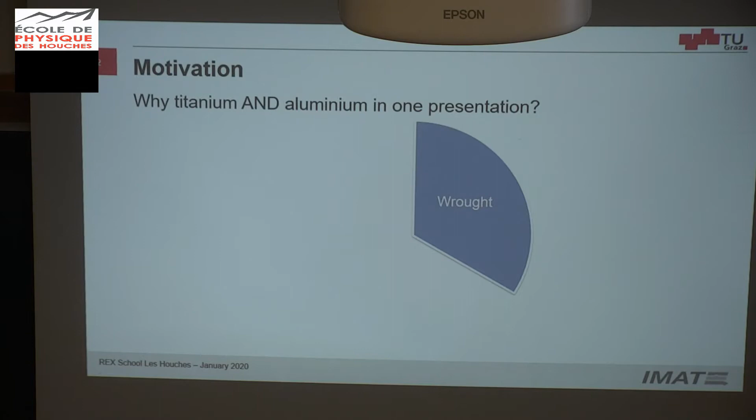The first question I asked myself when preparing this presentation is why titanium and aluminium in the same presentation? Of course I have my scientific answers, but the very first answer is both are mainly used as wrought materials. So it means I have to have a method for forming them. They are used for lightweight design, usually for transport industries, but not only.

This is the topic we are going to deal with today: we have grain refinement and texture issues, which means basically they don't dynamically recrystallize in the sense of discontinuous dynamic recrystallization, and therefore we don't have fine grains with random crystallographic orientations in the final products. These issues also have consequences in the applications.

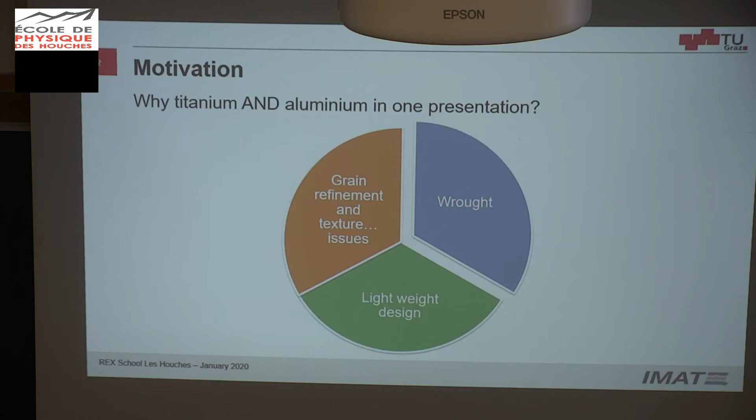I'm going to give a very short introduction on titanium and aluminium alloys because the audience is very wide, but I hope I'm not going to bore you. Then a very short introduction of what is the meaning of high stacking fault energy materials, and then I will go to the topic, which is the experiments and modeling.

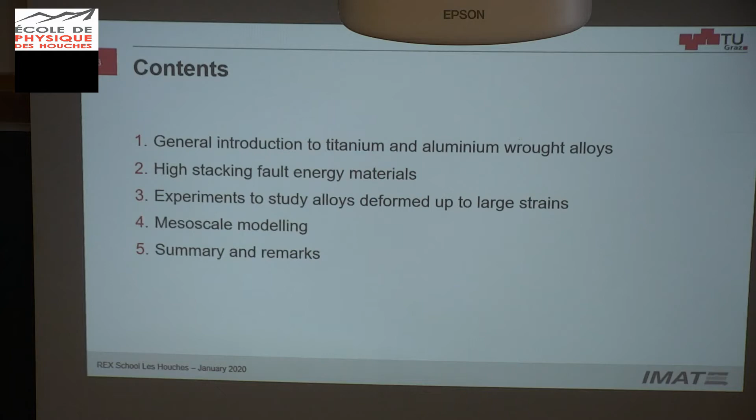My background is experimental. I did experimental things for many years, and then I moved a bit into the modeling, and now I cannot imagine any experiment without a model. And the other way around, I cannot imagine any model without experimental validations or explanations. So it's a big mix of everything I did.

Titanium alloys are used mainly for, as I said, transport lightweight design, also moderate high temperatures, but it's also used, as you have seen probably, like the Guggenheim in Bilbao - all covered by plates made of titanium alloys, because of the high corrosion resistance.

The most important thing in titanium alloys is that it's very similar to steels. If you know something about steels, then titanium is easy peasy. It's even easier because we don't have any eutectoid reaction, but we have this allotropic transformation. We have HCP at low temperatures, which is not close packed, meaning it's a bit longer in one axis, giving a crystallographic structure that is not that bad for deformation.

It also has some other slip systems that activate. By increasing the temperature, we transform into BCC - this is BCC, here is wrong, sorry.

By adding some alloying elements, we can stabilize the high temperature phase, and we can increase the temperature of transformation of this beta transus. Most titanium alloys have this type of configuration, where you have the temperature and the beta stabilizing elements. Also you have alpha stabilizing elements like aluminium, which would move the whole diagram upwards, and then you have a mixture, a dual microstructure of alpha and beta.

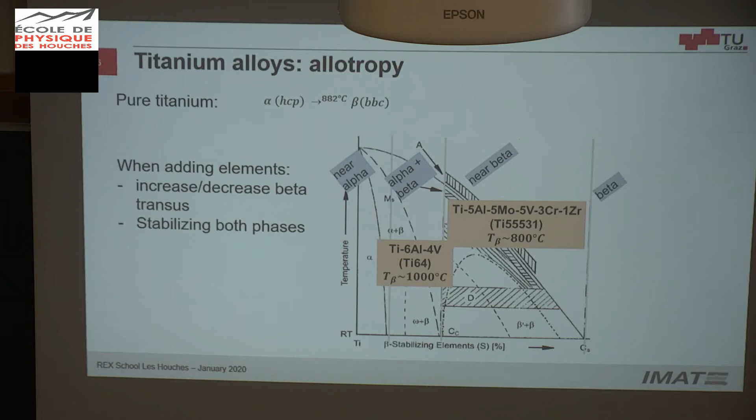So a very complex situation for deformation. These materials are processed either in beta or in alpha-beta, and this makes everything very complex when we want to understand it, control it, and then model it.

Okay, so aluminium alloys - most of you know it, it's almost everywhere. That's why I put it here. Very day-to-day examples. And this is one of my favorite products, to be honest.

Not the fish, but the aluminium foil, because it requires a lot of rolling steps - warm rolling, hot rolling, warm rolling. And then at the end, you cannot heat up again, take it from the furnace and roll again, because the heat transfer is very fast. Then you end up with cold rolling, and in between a lot of steps for recrystallization and also for precipitation. So it has a lot of complexities.

During these steps, you may have dynamic recovery during the deformation. If you do extrusion, you may have very large strains, and in the interpasses you have static recrystallization. So you end up with a microstructure which is very weird.

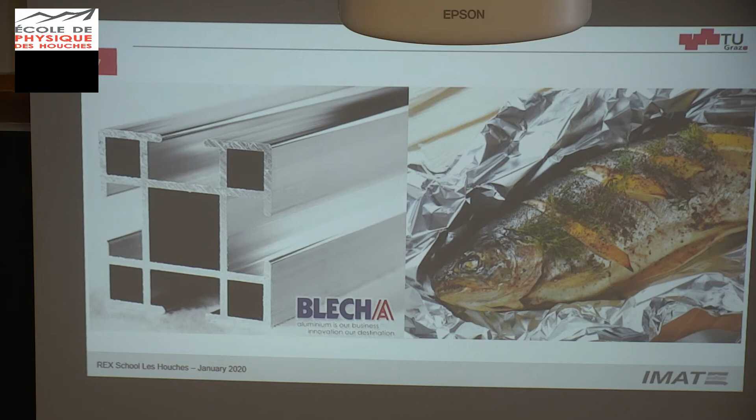What they have in common is that they are high stacking fault energy materials. What does this mean? If we have a perfect dislocation, it can dissociate into two partial dislocations. This configuration does not allow dislocations to move. So it's very difficult for a dislocation to go through stacking faults, and secondly, you lose the dislocations that move into two partial dislocations that are not moving anymore.

The larger this distance is, the more stable the stacking fault is, and the lower the energy you have for forming stacking faults. This is a simplified interpretation of stacking faults and stacking fault energies. But basically, if the stacking fault energy is very high, which means this distance is very small, the partial dislocations can reconfigure into a perfect dislocation, and the dislocation can move as before without problems.

Moving of dislocations is what you need for annihilation of dislocations, and mobile dislocations are what you need for dynamic recovery. So, to recall everything: if the stacking fault energy is very high, this distance is very small, these partial dislocations are not stable. The dislocations will move, and you will have dynamic recovery instead of dynamic recrystallization.

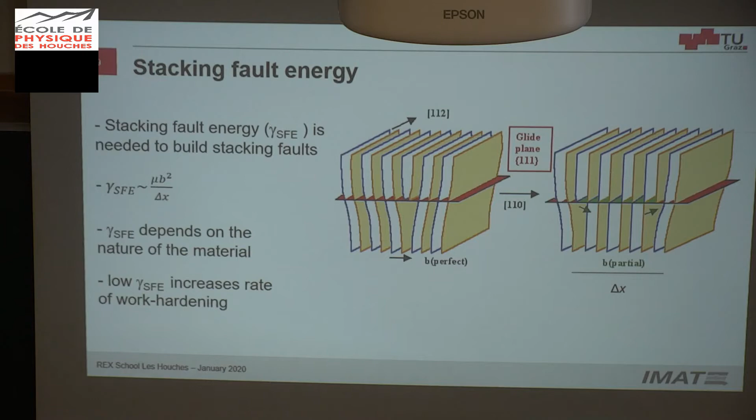The same happens with titanium alloys. Most of them, if you don't add a lot of alloying elements, behave this way. I don't know what happens with high entropy alloys - maybe you will find out in the future. But most materials are high stacking fault energy materials, which means they will go in this direction.

So when we start deformation, we have cold deformation and the density of dislocations increases - this is not what I'm covering in this talk. With warm deformation, at the beginning the density of dislocations increases up to a small strain, then we may have either dynamic recrystallization or discontinuous dynamic recrystallization, like in nickel-based alloys, or dynamic recovery in our case.

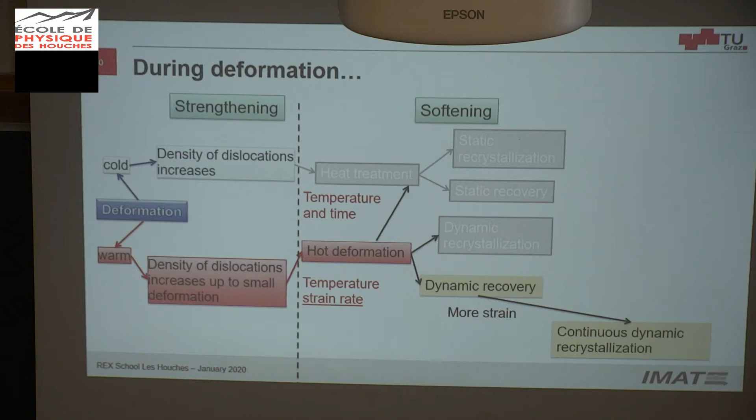If we go further with the strain, we will have what is called continuous dynamic recrystallization, or extended recovery, or many other names you can find in the literature. Basically, these materials form cells during cold deformation rather than stacking faults or twins. These cells look like this: we have dislocations at the cell walls and sparse dislocations within the cells.

During high temperature deformation, the cell walls get sharpened, and then you have subgrain formation instead of cells.

Good. Oops, sorry, come back. Oh, okay, sorry, this isn't supposed to be like this.

So the question of how to refine the grain in high stacking fault energy materials is not new. It was first done, I have to calculate, about 60 years ago, by Rossard, who asked whether there is any form of dynamic recrystallization in aluminium alloys or ferritic steels. By the way, ferritic steels are also high stacking fault energy materials, so you can imagine the same applies as what I'm saying now, but for steels. Why am I not showing steels here? Because I basically don't work on steels, but you can imagine the same applies for ferritic steels.

In 1986, McQueen came with the idea that there is some type of recrystallization when high-angle grain boundaries get flattened by compression, for instance, and get pinched off by the formation of subgrains. This is called geometric dynamic recrystallization, which means you need huge deformation to get very thin, plate-like grains, along with formation of subgrains due to dynamic recovery.

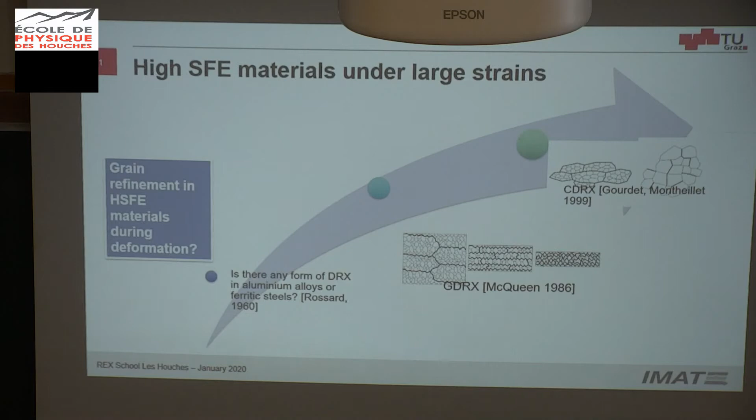When we want to study deformation at large strains, we think about experiments and models. The models, in my opinion, are not meant to replace experiments. Yesterday in the Digimu workshop the same idea was given. The models are a way of explaining the phenomena, as well as reducing the amount of experiments or directing experiments in one direction, but not completely getting rid of experiments. We need experiments to explain and validate, so both of them—otherwise we don't know what we are modeling.

And this was one of the largest problems with respect to continuous dynamic recrystallization and titanium alloys. I'm going to show this afterwards.

So in the experiments, when we want to get deformation at large strains, we want to get the flow curves—stress strain—and the samples for further investigation.

So, you're laughing, but this is not always understood. What did you do with the samples? I threw them away, I don't know the name. I changed them, I mixed them.

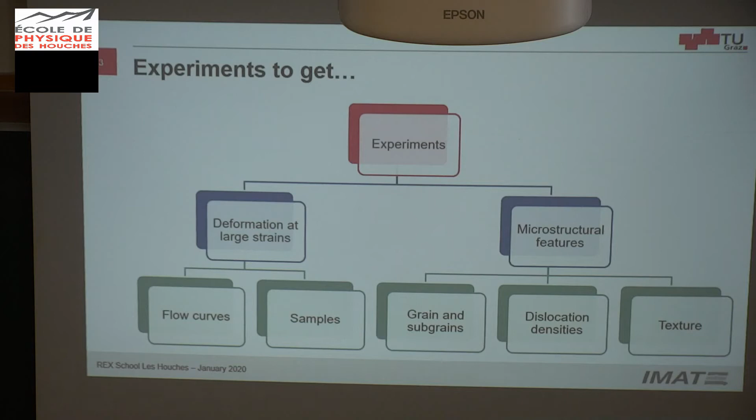Which experiments? For deformation at large strains, you don't have many options. You have hot torsion—this is a typical experiment, not a new one. You may have something similar in industry, like hot extrusion. There's also a way of getting large strains in small steps: you get a strain, then static phenomena, strain again, static phenomena again—so you have cumulative large strain, but not continuously.

For microstructural features, you may use direct methods—you open the material and take a look at it. This is microscopy, any type of microscopy, mainly for dynamic recovery. We use a lot of EBSD.

I have a clock there. Okay, thank you.

Then you have other methods, indirect methods, which are not much used. I know Andras is working a lot on XRD, but you may also have differential scanning calorimetry to account for stored energy, for example, or hardness. It's a very simple method, hardness, but it gives a lot of information about stored energy.

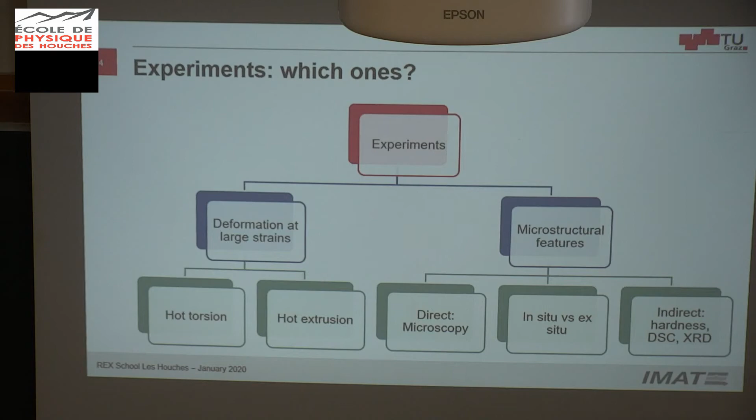So I'm going to show only one of my favorite experiments, the torsion test, which we do in a Gleeble machine. I don't know how many of you know the Gleeble machine—one, two, three, four—ah, a lot, good, great. So you know all the pros and cons, or most of them.

It's fast. You can control the temperature very well because the thermocouples are attached to the sample. You can do in-situ water quenching, which is essential if you want to study dynamic recovery. Otherwise, you will have static recrystallization during cooling, or metadynamic recrystallization in this case—but static recrystallization occurs very fast.

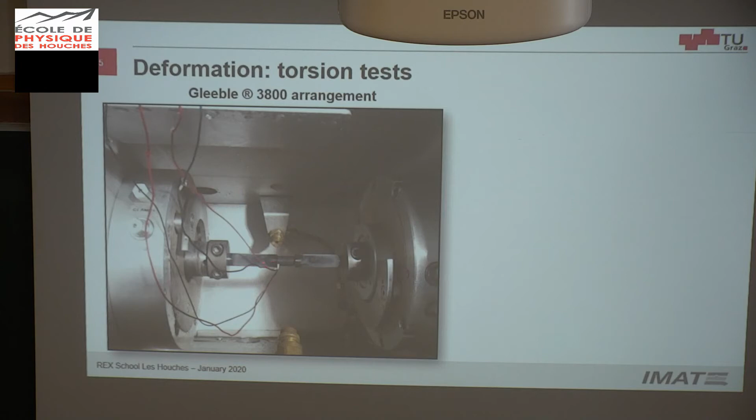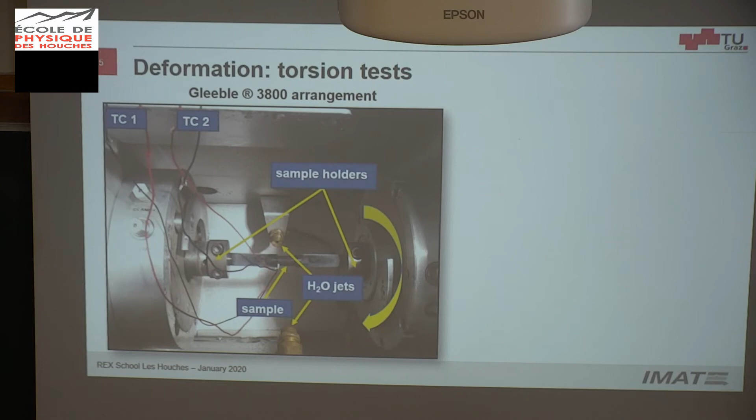And in this case, this is here the sample. These are the sample holders, and one head is rotating infinitely until the material breaks. You can heat up the sample by alternative current, by the ohmic resistance of the material.

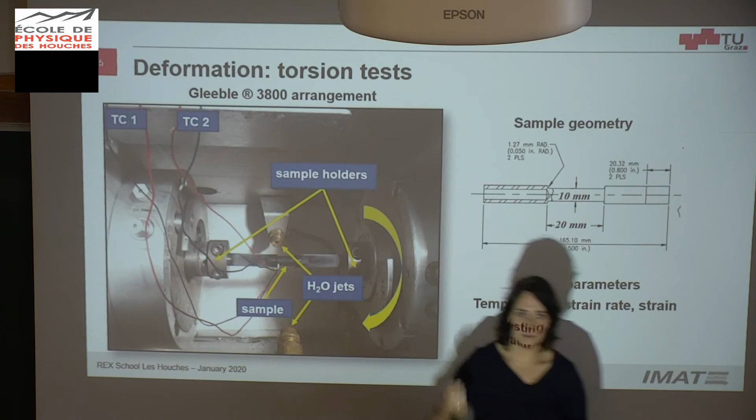Of course, if you put the thermocouple here, in the middle of the sample, and you start rotating, then you strangulate your sample. So this is not the best way. So you put the thermocouple on the shoulder.

The shoulder looks like this. The sample looks like this. It's hollowed at the heads. With this, you get more or less the same area here than here, so the same section, and more or less the same resistance, and with this, more or less the same temperature.

What we do is usually we just put thermocouples here, do heat treatments and calibrate until we know which temperature we have to control or set here to get what we want. The most important thing is to decrease the gradient of temperature here, because a large gradient of temperature produces flow localization, which is not desired.

Yeah, so you have a technical question. Your sample has this total length, or is only 20? This is the total length here, all of this is the same. And you drill a hole to slide the thermocouple in? No, the thermocouple is spot welded here on the shoulder of the sample.

No, it's only this part. If the sample is good, only this part is deforming, and this is not deforming. But of course, you may have some difference in temperature between this point and this point. What you don't want is a temperature gradient along the gauge. This is what you don't want.

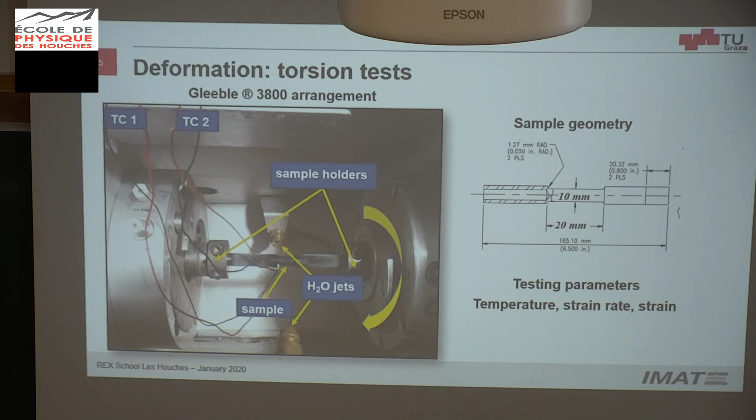And then you have the water jets. These are positioned here. In our case, we had to also modify this a bit, because we saw that it was cooling down only from one side and not from the other. Good. If you have further questions on the Gleeble, I will be very happy to answer them.

So the first trials on aluminium alloys showed something like this. This is light optical microscopy along the gauge, and this is EBSD. What you see is that the microstructure is very heterogeneous.

So we didn't cut as usual. People cut at a given percentage and just watch the microstructure to represent the global strain and stress values. What we wanted to do is see the evolution of these boundaries. Here in blue you see low angle grain boundaries, and in black high angle grain boundaries.

By increasing the strain, the strain in the middle should be 0. In this case it's not, because the sample was not really aligned, but it must be 0. Then we increase the strain in this direction, but due to the texture of the material, we got this, with some misalignment. We also got this very strange pattern.

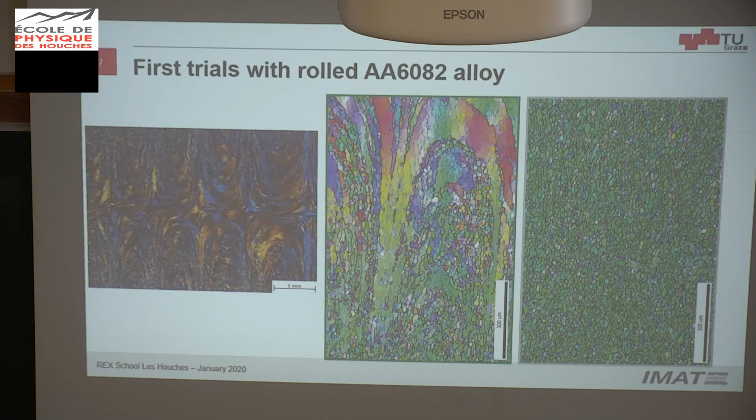We can also see the evolution of the dynamic recovery, continuously transforming into high angle grain boundaries. And what you can see, everything is green, which means we have a very large texture. We produce a textured material.

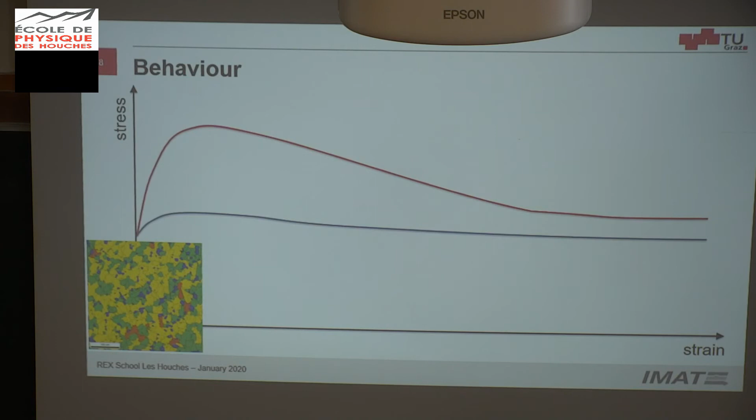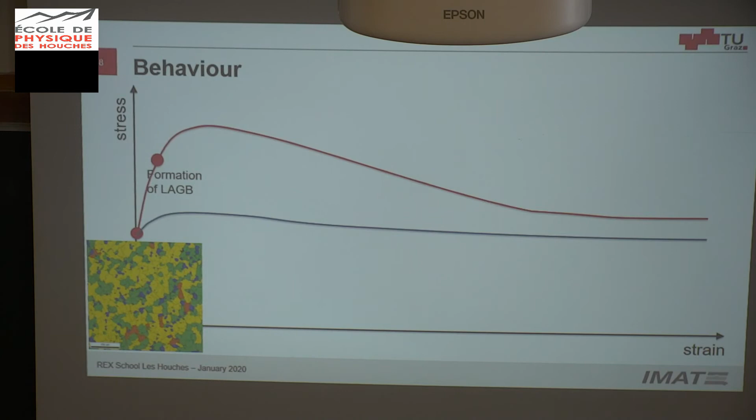So then we decided to go to another material, an extruded material. You will see some of the pictures taken in this direction and some in the other direction of the grains. We have deformation - this is a sketch of low angle grain boundaries at low temperatures. Then at one point we have formation of high angle grain boundaries, and we assume that when we have a steady state at very large strains, above 5 or 10, depending on the temperature and strain rate, we have 100% of recrystallization reached.

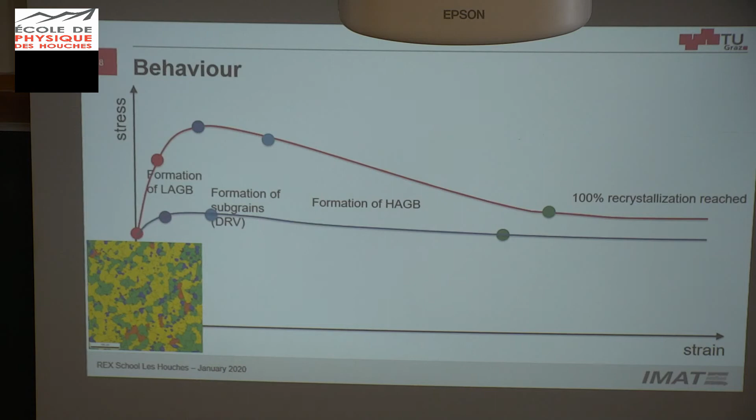Good, and this is how it looks if I go to 350 degrees or higher temperatures. This is GOS, so grain orientation spread map. Blue means low misorientation within the grains, and orange means high misorientation within the grains. It goes through very large transformations until it really starts to dynamically recrystallize continuously.

Since it's not easy to quantify the dynamic recrystallization rate, what we use is the fraction of high-angle grain boundaries. It's another way of counting the percentage or grade of recrystallization. If you only have high-angle grain boundaries, then you have 100% fraction of high-angle grain boundaries, meaning 100% recrystallization.

And in this case, you can compare - the fraction is 67% compared to 14% recrystallization grade. So it's a way of counting this. There's no other way we have in this case.

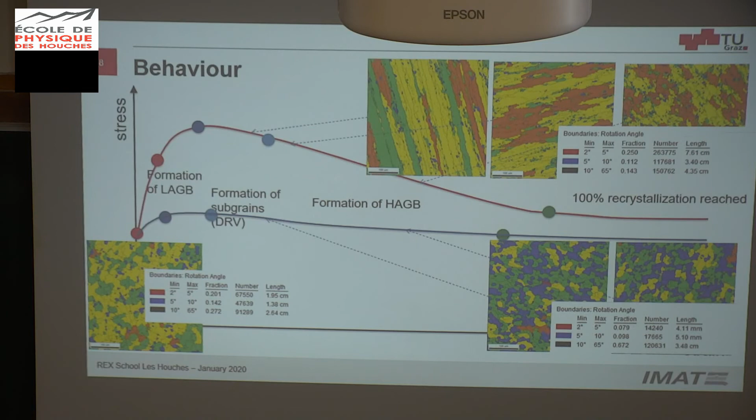We also were trying to quantify geometric necessary dislocations. This is what you get from the KAM maps, and this is the evolution for the as-received samples. The as-received condition is also a mixture of dynamic recovered and static recrystallized structure.

By deforming at low temperatures, we increment the stored energy. So here is the geometric necessary dislocation density. In this direction, you go to higher values of dislocation densities or stored energy, whatever way you want to see it.

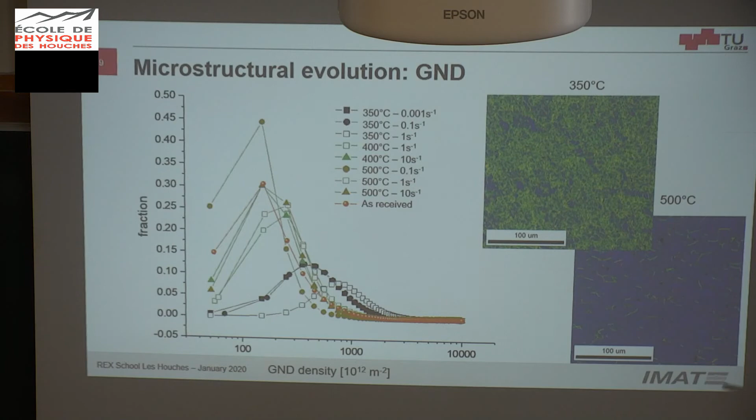So in this direction, we are increasing - this is lower strain rate, higher strain rate, so we increase the stored energy. When we go to higher temperatures, we also get into the other direction. This is very typical - you'll see this not only for large strains but also for low strains. You will see that you increase the recovery at higher temperatures if you go in this direction, and you increase the stored energy in the other direction.

So we tried to do, and we did successfully, an in-situ torsion test. It took us a while because it was difficult to get the proposal approved. Nobody believed that we could do this, and it took us very long until we could do this experiment.

So what is the idea of this? We do torsion tests, and with this we get an incident beam that we made as flat as possible. So we have only one part of the sample very close to the surface, and as it rotates, of course you don't see always the same part of the sample.

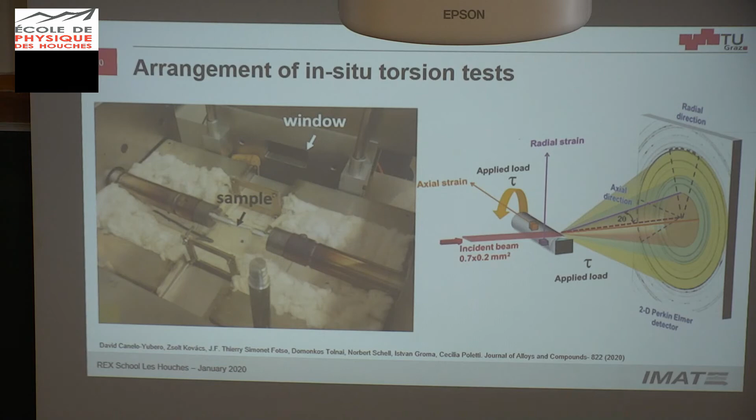But we also could get the evolution of the crystallite size and the dislocation density. At the beginning I was very disappointed because the crystallite size is not the subgrain size, it's not the grain size, it's an entity - much smaller than the subgrain size, and it's only a coherent domain. It's very difficult to interpret and correlate with respect to the EBSD data.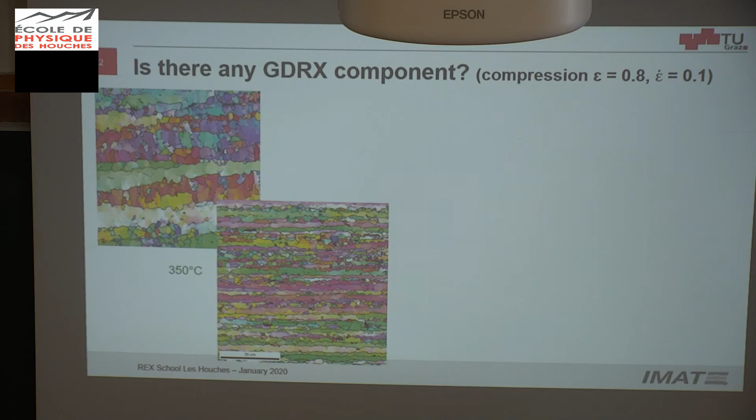So what we did is we took this material and compressed it in both directions, in this direction and in this direction, to see if there is a difference. As you expected, indeed there is a difference. If we compress in this direction, we get this microstructure. If we compress in the other direction, we may have some pinching of the high angle grain boundaries, and as you can see, we have much more new grains formed only by geometric dynamic recrystallization - this is only compressed, so no very large strains.

And the same if we do it at higher temperatures, as you can see, this should be - and as you can see here again, we have a much larger amount of grains. So it means there are some geometric dynamic recrystallization components. We are still analyzing how important they are and what their influence is on the final microstructure.

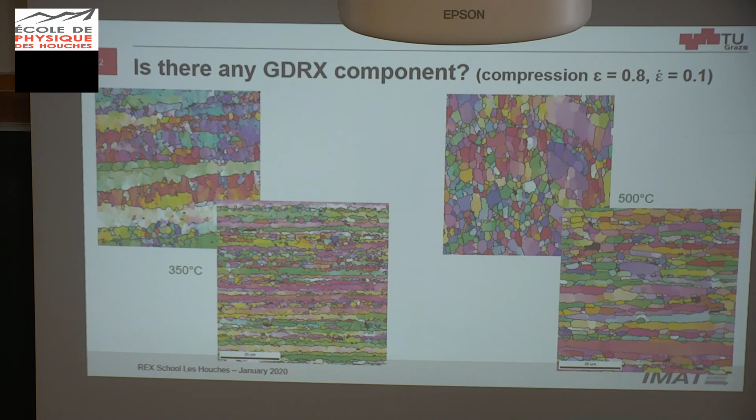Okay, let's move now to titanium alloys.

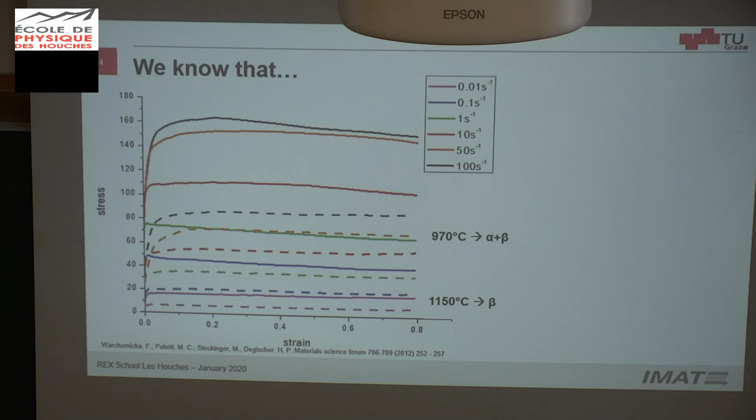We know that if we do deformation in titanium 6-4, when you cool down you have martensite. It's awful for reconstruction, so you see that there is no recrystallization. This is cooled down, there is no recrystallization, so the grain boundary is moved a bit. They are serrated with respect to strain rate, or with respect to the size of the subgrain. But there is no recrystallization.

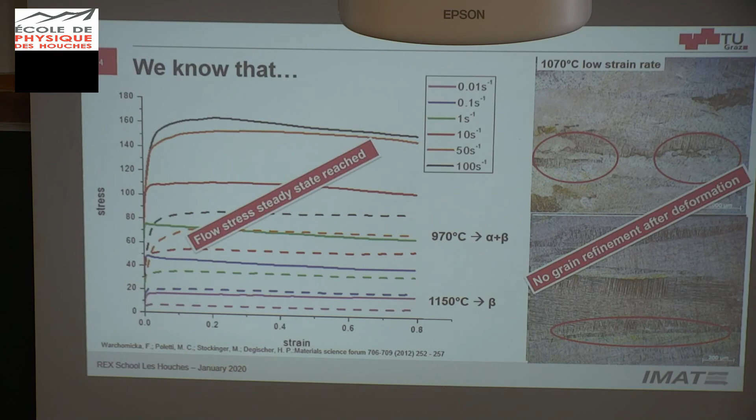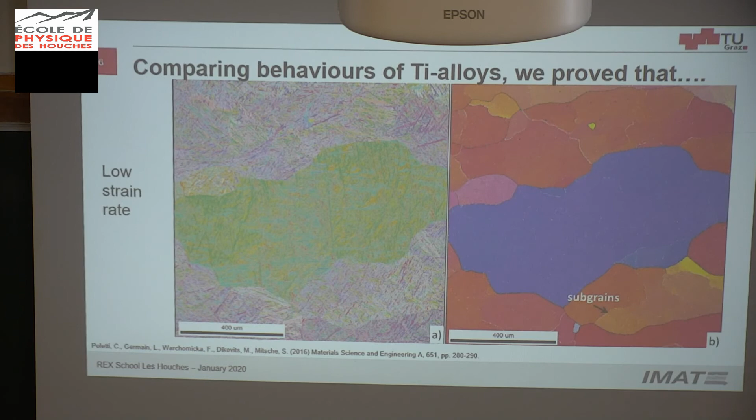And if we reconstruct titanium 6-4, this martensitic structure, into the high temperature phase, this is the martensitic transformation, we reconstruct now the beta phase. We also can see the formation of subgrains and the formation of probably new grains by geometric dynamic recrystallization or continuous dynamic recrystallization at the boundaries, and subgrains as well. So there is no discontinuous dynamic recrystallization in titanium alloys.

And there are still not a lot of publications because it's very difficult to get these kind of results where you quench immediately after the deformation. Especially when you go to very high temperatures, it's very difficult to really quench and have in situ experiments.

And this is important for us afterwards for the modeling. We are not modeling discontinuous dynamic recrystallization with critical strain and so on.

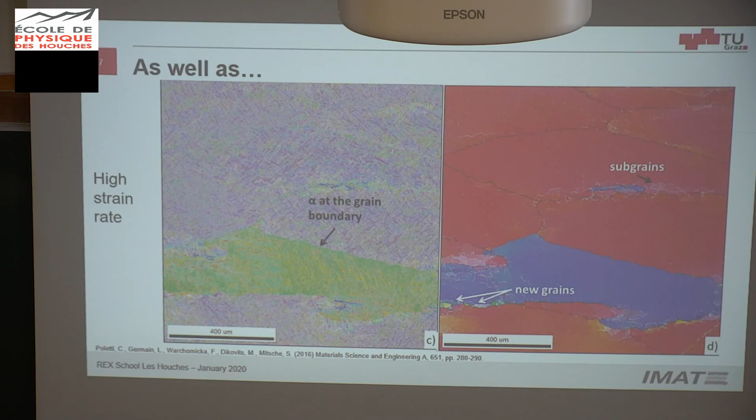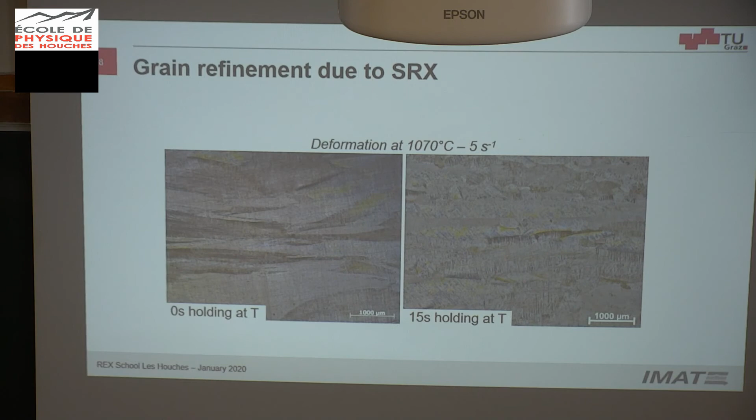And we may have grain refinement due to continuous dynamic recrystallization. What I'm showing here are experiments of the flow curves of compression tests, the same I showed before. Now they look a bit weird in this scale. And torsion tests. In the torsion test, the first thing you see is you have also an increment in the dislocation density, but we have a huge drop in the stresses. At very large strains, we have also a plateau.

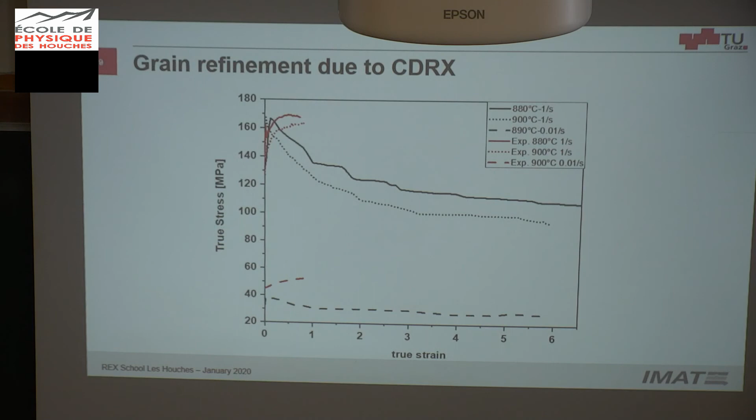At this drop, we have some explanations for it. One is the continuous dynamic recrystallization. The other explanation is we have a texture modification, which leads to a Taylor factor modification. But these two things are not enough, so probably we have something else that we still have to understand.

So here you can see the grain refinement after almost a strain of 6 of deformation at high temperatures, and this is in the two phases range, close to the two phases range. Sorry, the beta transus temperature is 870 in this case.

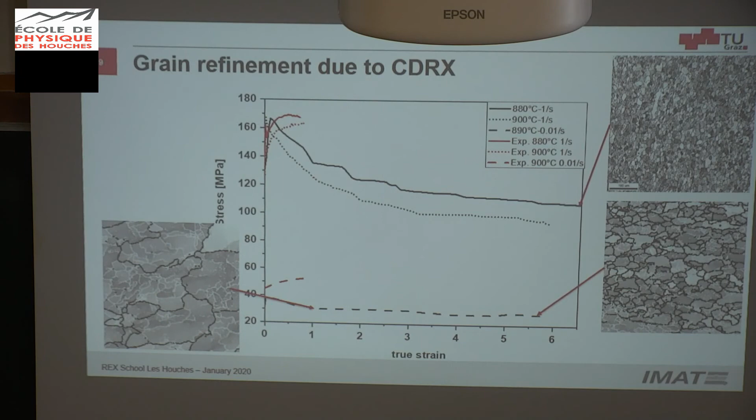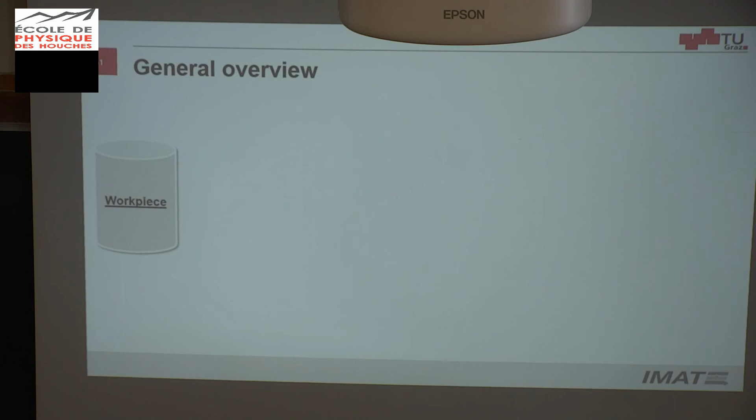Good, now let's go shortly to the interpretation and modeling. I only have 5 minutes, so I will skip this. I would like to start with this and what we have done, and then I will show one or two results.

This is what you usually do when you want to express the stress as a function of the dislocation density, and then you use the Kocks-Mecking equation. I think most of you know this equation. This is the hardening part, and this is the recovery part. So I'm going to tell you why we are not using this.

First of all, here you have the dislocation density, which means that all dislocations produce the same strain field. This is telling us that dislocations are isolated, producing a strain field, and this has a consequence. This is not taking into account dislocations at boundaries where the strain field is smaller or forming dipoles.

The second thing is h and r are usually fitting parameters. They can be correlated to the temperature in an Arrhenius type relation, or phenomenologically correlated to the strain rate with the strain rate sensitivity. But in any case, you need to adjust them, and there is nothing related to what is happening to dislocations or the interaction of dislocations.

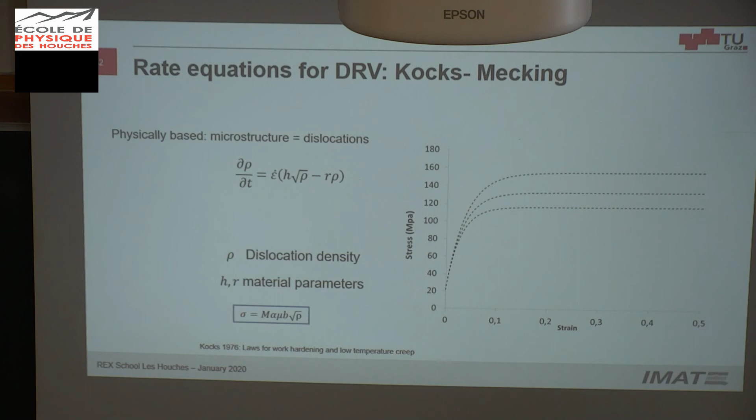So what we did is we start with this. Then we saw that for cold and hot deformation, one dislocation density is not enough, so we moved into three dislocation densities: at the walls, interiors, and mobile dislocation densities. Then we also implemented what happens if the dislocations at the walls start increasing the misorientation. This is not included in Roters' model, it's included in the model of Montheillet.

Then we replaced the h and r, hardening and recovery, by the Ghoniem equations. These equations come from creep, not from hot deformation. They are very old equations that describe what happens during dynamic recovery during dislocation creep. It's not diffusion creep.

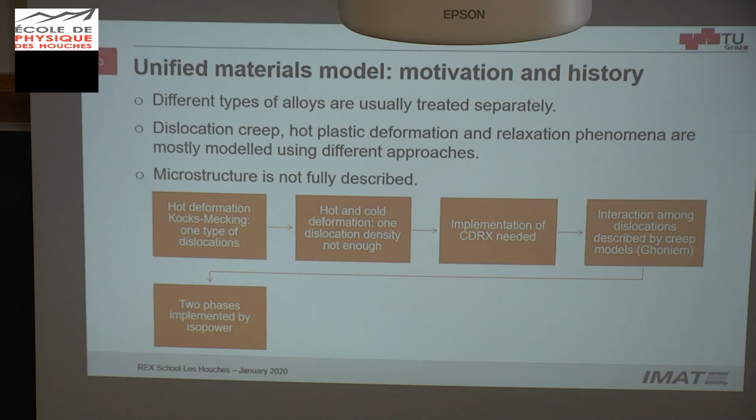What happens with the interaction of dislocations? There are rate equations expressing that if a mobile dislocation gets stuck somewhere, it becomes immobile. These mobile dislocations increase the dislocation density of the wall, transforming into another type. So it's a reaction type equation. We introduced this, and of course we introduced the two phases for titanium alloys in an isopower way.

What is missing are heterogeneities, texture, and geometric dynamic recrystallization. With all this, we want to use the same internal variables, which are dislocation densities, sub-grain sizes, and grain sizes, which are included, along with particles and so on. These are all the internal variables.

We want to describe hot deformation as well as creep, dislocation creep of course. We want to use one model for all these phenomena, and we want to use one model for all high stacking fault energy materials. So I'm going to show them.

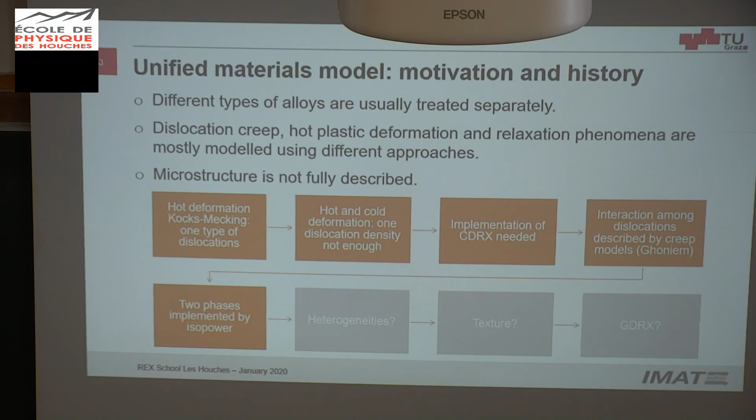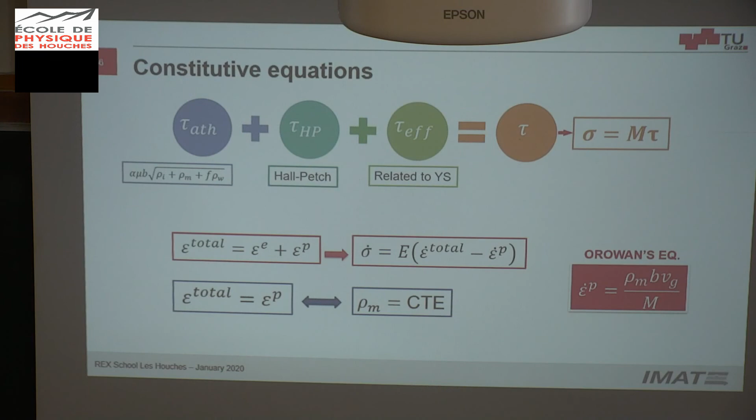This is more or less what I already said. So we have the constitutive equations. Okay, I can leave it, I think. Why am I so slow?

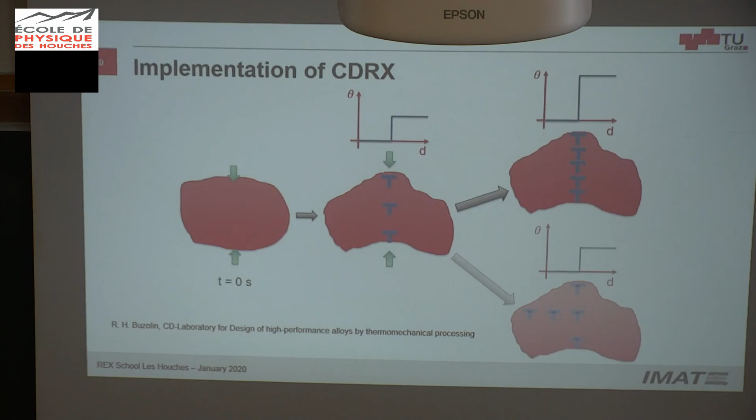I want to show you a summary of the model. For the model, we need as input the external variables, the strength parameters. We are not yet in a position to calculate yield strength directly. We also need the microstructure, initial microstructure, initial material parameters, activation energies, and high angle grain boundary mobility.

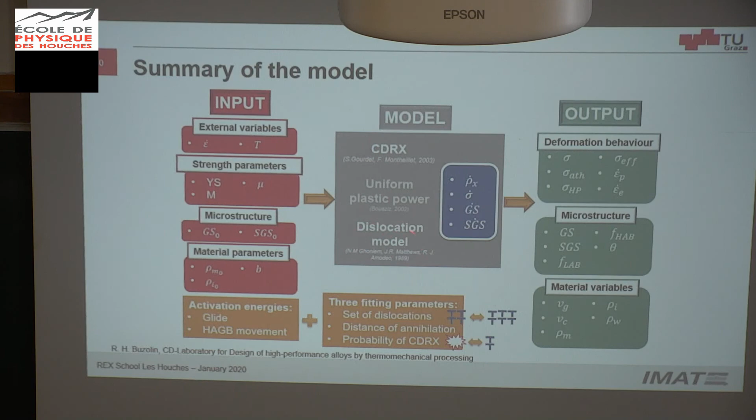The outputs are all these here. It's not only the stress-strain curves, it's also the microstructure, the recrystallization rate, the fraction of high angle grain boundaries, and also some glide and climb velocities as material variables. Again, we use the continuous dynamic recrystallization model as Montheillet stated, combined with the Ghoniem equations from creep and uniform plastic power.

Some results. So this is only up to small strains. So we can catch at high strains the softening of the flow.

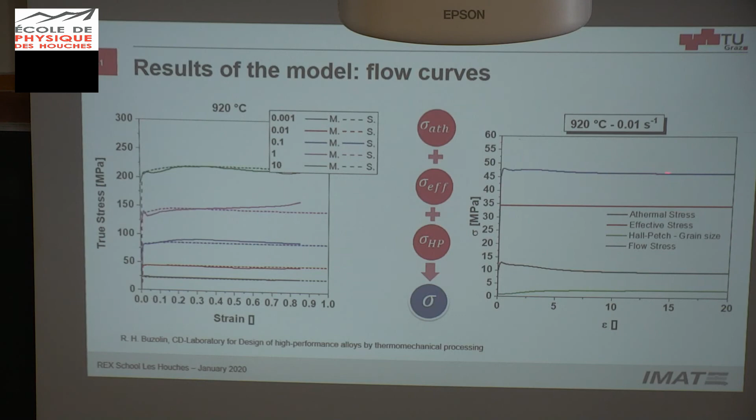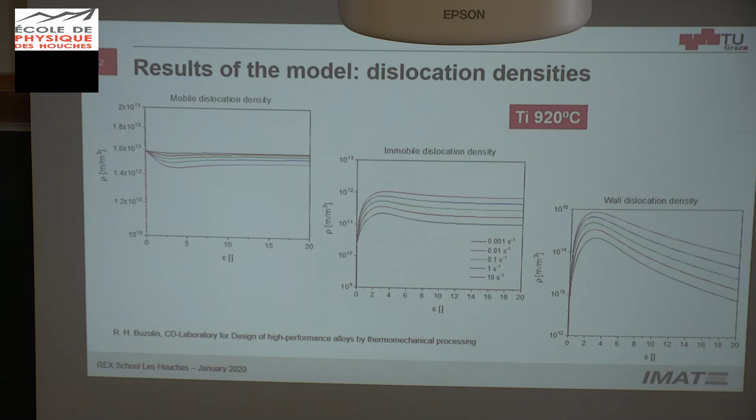And we can also catch internal variables: mobile dislocation density as a function of strain, immobile dislocation density, wall dislocation density, which are decreasing because we have continuous dynamic recrystallization. When the low angle grain boundary becomes a high angle grain boundary, then it disappears from here, let's say.

And the most interesting part is we can catch the subgrain size. So first a drop and then an increment, very similar to the measurements that we have done of the crystallite size in the in-situ measurements.

We can get the grain size as well, so the refinement of the grains. You can think about extrusion processes. We get the fraction of high-angle grain boundaries, which if we start with a recrystallized material, first decreases and then increases until we reach recrystallization.

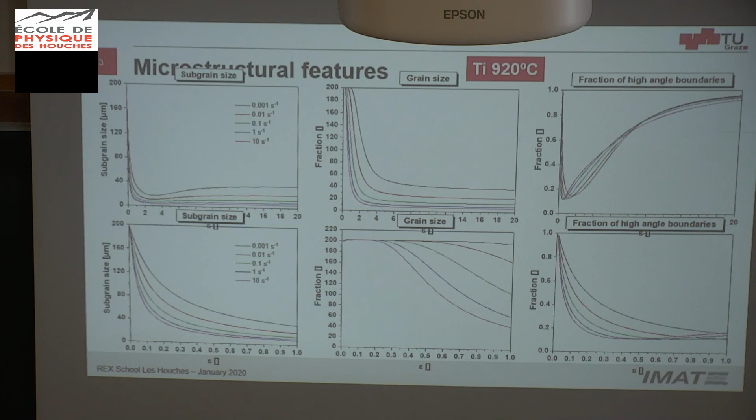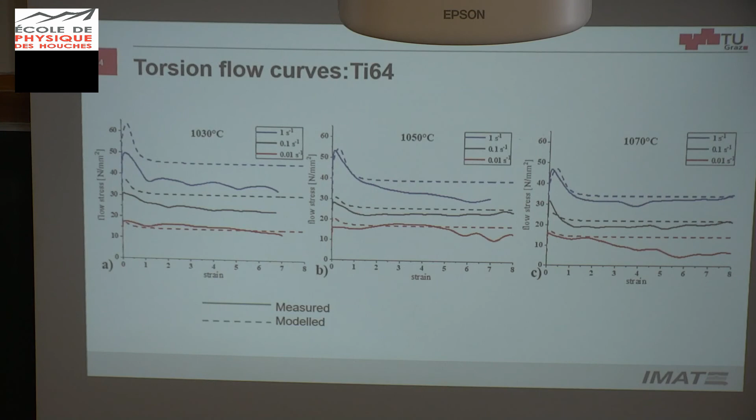And with this, these are only zooms up to a strain of one. And the same for torsion flow curves, here we have some issues still to clarify. Okay, I'm very sorry that I was that slow.

What I want to summarize is we are dealing with high stacking fault energy materials. They undergo dynamic recovery, followed by continuous dynamic recrystallization, but also geometric dynamic recrystallization can occur. We have texture changes, grain refinement at very large strains, and we can model it.

The model allows us to explain both the stress behavior as well as the microstructure behavior. So if you have any questions, I will be glad to answer them.